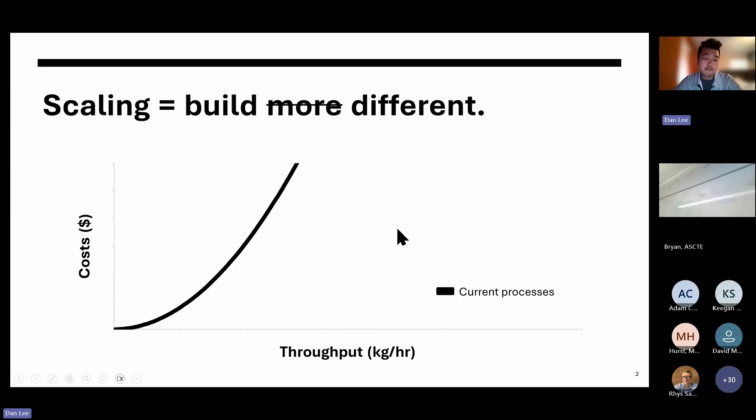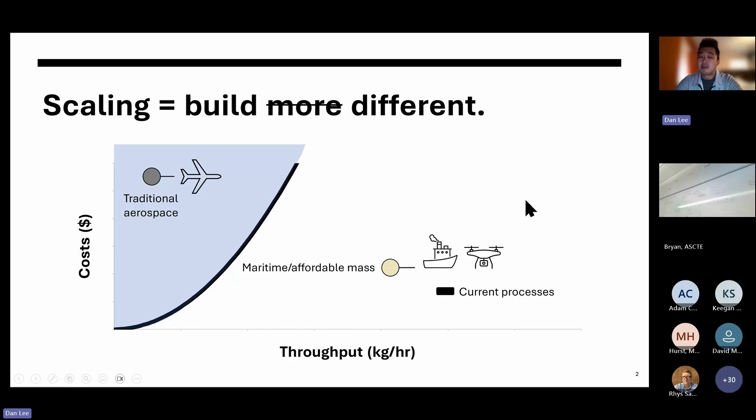So I'd say traditional aerospace is one of the very few that can afford it. But if we look at the new sectors emerging in maritime and affordable mass, they live on the opposite end of this curve, where you need the high throughputs and you also need them at low cost. So the challenge we set for ourselves is how do we achieve a cost curve where we can achieve high throughputs without exploding the cost with equipment.

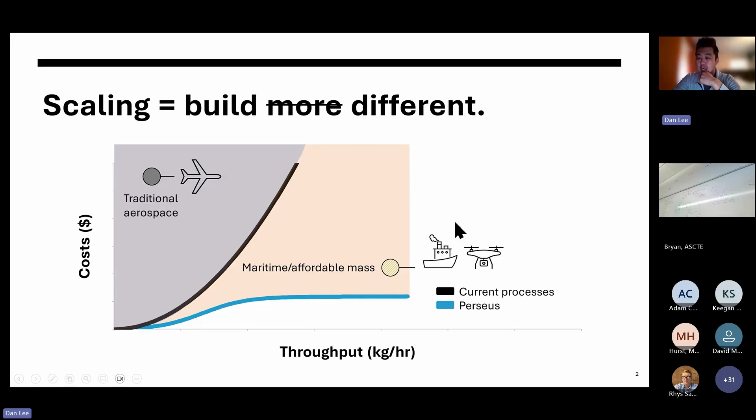We're a relatively small team, but we thought that what we needed to do was assemble a core set of expertise that allowed us to approach the problem very differently. So we're a team of 5 engineers, but I want to highlight some of the key perspectives we bring. I have a PhD in synthetic chemistry and experience in industrial and process control.

I worked in oil and gas for the early part of my career. And then Munir, our CTO, is a materials and process leader and expert in composite materials. He spent 20 years in aviation and brings that rigor and more conventional ways of thinking about composites and the manufacturing, both traditional and high throughput.

But what we've also done is surround ourselves with advisors in industries that we think bring very important constraints. So I'm going to highlight the middle two here, Ryan and Steve. These are industry giants from wind turbine blade manufacturing. To us, that is critical because I'm talking about blades that are 100 meters, 300 feet long.

The reason we think this is a very important industry to learn from is that wind energy is cost constrained. It has to compete for energy prices against solar and natural gas. So if we look at the total cost of a finished blade that's 300 feet long, it's on the order of $5 a pound, which is an order of magnitude lower than high-end aerospace composites. There's a lot that we think we can adapt from this industry into things like maritime and affordable mass.

So the insight that we bring on the technology side is that non-natural behavior resins are important to break that cost curve. So I want to break down a little bit more. If we look at a traditional composite today...

They can be made of multiple materials, but in general you have fibers and a binder or a resin. These fibers dominate the properties, and the resins dominate the processing. And in general, these are notorious to scale in speed or in automation, whatever it is.

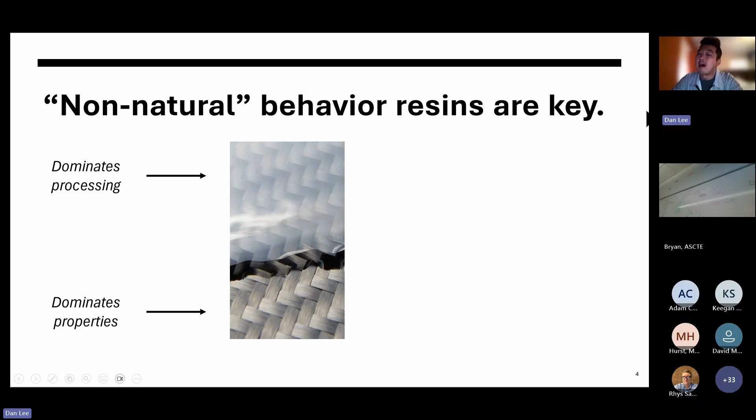When we started, I was an industry outsider, so to me it was very obvious that these were unscalable. If we look back to the first composites we've ever made as humans, let's say straw and mud, we kind of build them the same way. We've upgraded the straw to carbon fiber and the mud to an epoxy, but operationally they're nearly identical.

We mix the stuff together, we shape it, and then we have to wait. That is really defined by the kinetics and the behavior of that binder. So the way the epoxies cure, the mud dries, it enforces a lot of the very similar constraints.

So when we start to think about how do we make step changes in composite manufacturing, we wanted to attack the binder. And we wanted to go not just into how do we make faster curing resins or stronger resins - we wanted resins that behave on axes that don't even exist today.

So if you think about a traditional epoxy, let's say, or a snap cure epoxy, they are very different, and they do allow differences in manufacturing, but they exist on that same axis of how long does it take to cure - is it on the order of hours or is it seconds to minutes?

So to make entirely new processes that are very different and far more efficient, we needed resins that also behave on axes that we don't even think about today. So as a polymer chemist, we were digging into literature and doing a lot of research on these very odd behaviors. We landed on a phenomenon that today is known as frontal polymerization.

And that's been known since the 1970s. It's very difficult to induce for all sorts of technical reasons, but I want to show you what it looks like in general.

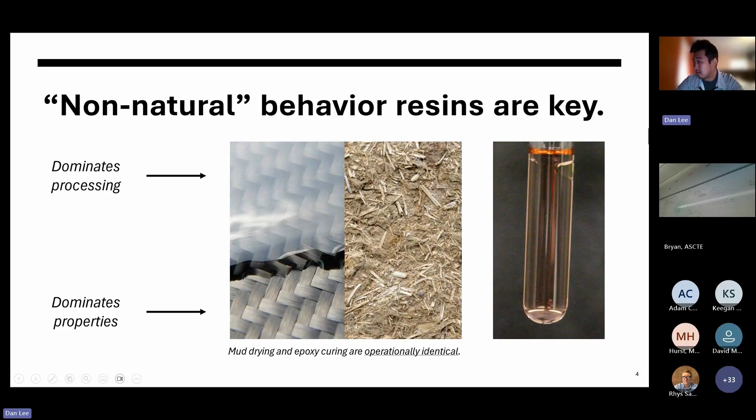So this is a vial of our resins that is sitting at maybe 20 Celsius, so ambient temperatures. What we do is we initiate a curing reaction, and then we can watch it happen in real time. So the top is a completely cured material, 100% cure, and the bottom remains 0% cure.

And it happens heterogeneously. So instead of, let's say in a traditional cure, where you have your whole volume of resin kind of going - if you measure the rate of cure at any point during a traditional cure, it's the same everywhere - in this case, you have a very fast cure in different regions and 0% rate of cure in different regions.

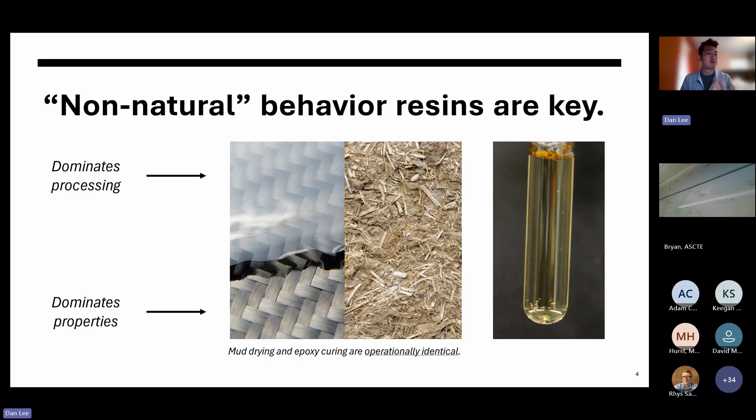And so this kind of opens up all sorts of new ways to think about how do we do continuous processing of batch-wise processes, and we can talk about all sorts of other things it enables. But what we then did was we took this base behavior that we thought would enable all sorts of different processes, and we built the first core manufacturing technology.

And this is the technology that launched Perseus in '22 and '23, funded by ARPA-E Innovation Crossroads, which is a kind of entrepreneurship program out of Oak Ridge National Laboratory, National Science Foundation. And conceptually, we also won the Startup Booster at JEC World, which is the largest composites trade show, and it was in Paris last year.

So a little bit more about how it works. Again, we're currently focusing on beams and panels, and we want to use them for things like spars, stringers, hulls, things like that. And I want to show you these a little bit more in detail.

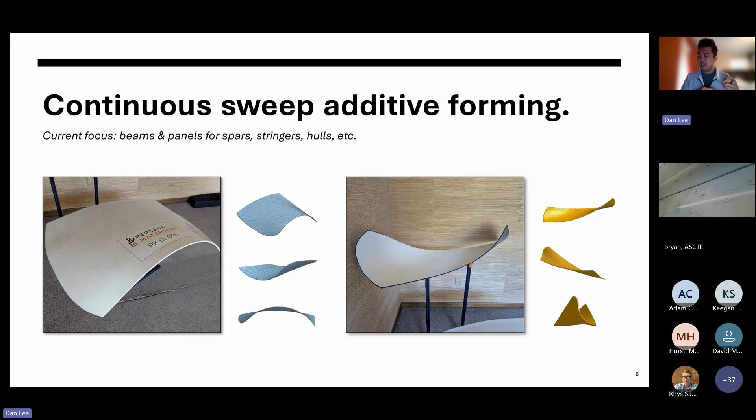It's like 3D printing in that we have a digital file that we convert and use to control the machine, but we also have a continuous forming process, and I'll show you a video about it. So the way that we think about how this process fits into the landscape of very advanced technology.

One of the ways that we can break this down is we have high rates and low rates in terms of kilograms per hour, and then static tooling on the left and adaptable tooling on the right. They all have their niches.

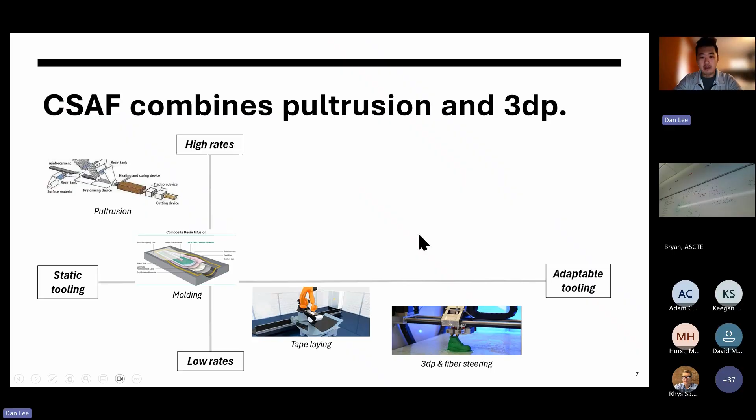I'm not saying it's better or worse, but what we're trying to do is combine a manufacturing process that allows us to achieve the adaptability and low lead times of 3D printing with the low cycle times of processes like pultrusion, and how we might do that.

So obviously the way we're doing that is we're limiting the kinds of geometries and topologies we're currently able to make, but this is the ultimate goal: a suite of manufacturing processes that can tackle both lead time and cycle times simultaneously.

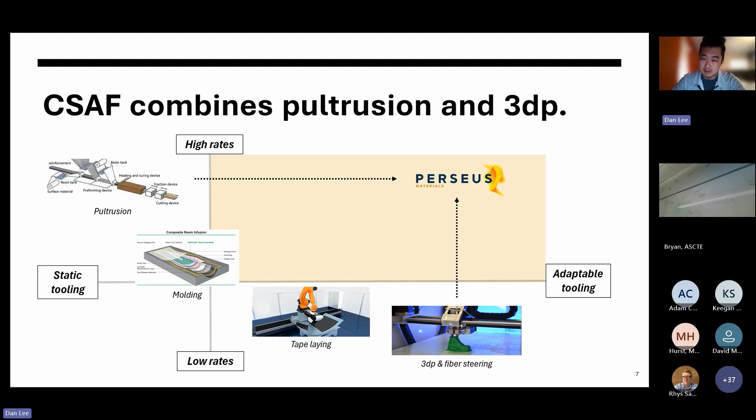On a very high schematic level, what we do is, in this one, the machine is reduced to, let's say, that frame. And in that frame there are these actuators with a white material, which we use as the kind of adaptable molding surface.

So we load our fibers, and like pultrusion, we use continuous fibers. We can pull them through a bath, and then load them into the machine. But like 3D printing, we also load a CAD file, and we have a way to communicate with this machine. As we continue to pull that part through, we can shape it and cure it simultaneously.

And if you think about where that frontal polymerization is, where that interface between liquid and solid is, we control that very precisely in that machine, and we do it in that plane of the die.

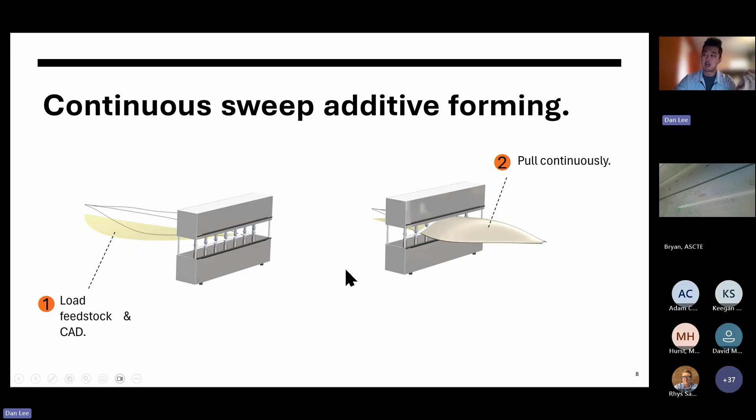So upstream of the die is completely liquid, uncured material, and then downstream of the die is solidified material without a post cure.

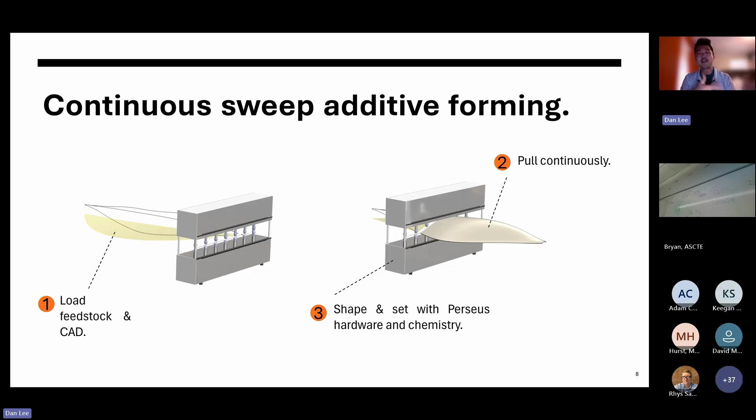And so, I wouldn't say it's easy. There are unique challenges with this type of process control, but it's been an interesting pursuit.

Here's a video of our very first, I would say, large-ish piece. It was about 4 feet by 6 feet, with a laminate thickness of about half an inch. This laminate started at half an inch thick, so here it's flat, and we use this to demonstrate.

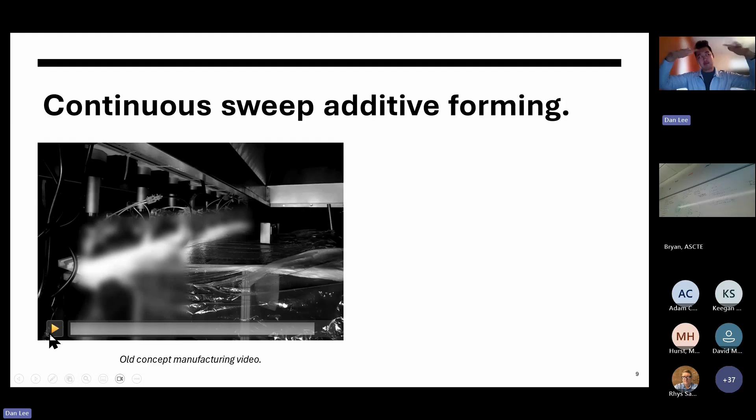As we're pulling, we're going to change it from a flat to an arc. Obviously this is already cured, so it stays flat on the right end, and then it's arced coming out of the machine. You can see it over here.

The reason I paused it here is on the left side you can see it's very loose fabric. We use 1200 GSM stitched, Saertex product, and we can use kind of any fiber freeform, but in this case we use stitched mats.

These are unidirectional fibers, and this had 13 layers of glass in it. But you can see over here it's loose.

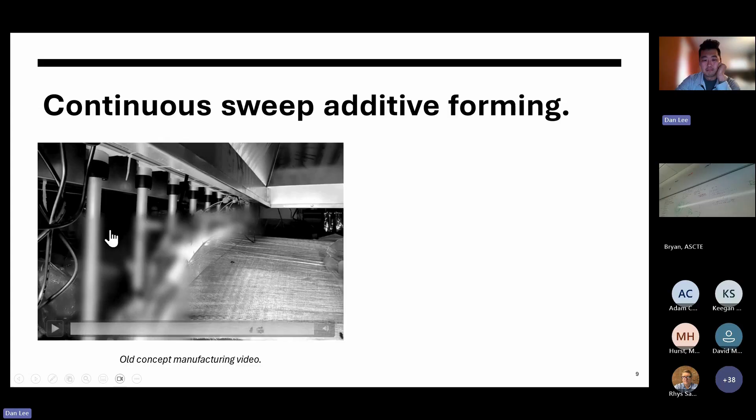But at this thickness, we can pull at about 12 inches a minute, and that puts us on the order of a production rate of 200 kilograms an hour.

And we're working on all sorts of different ways to improve this. I would say the tolerances are definitely the most interesting challenge. There are lots of trade-offs that we make in this machine.

For example, the harder we compress — since it's mechanically induced — we can push harder and harder to compress that composite more and more. This is one way that we try to think outside of autoclave processing.

We can achieve 90 psi, we can achieve 500 psi if we wanted to, because it's mechanically induced. But there are other trade-offs that we make in the form tolerances. For example, as we squish more and more, the actuators bend out of plane. So there are some compromises that we have to make in the current iteration of the machine.

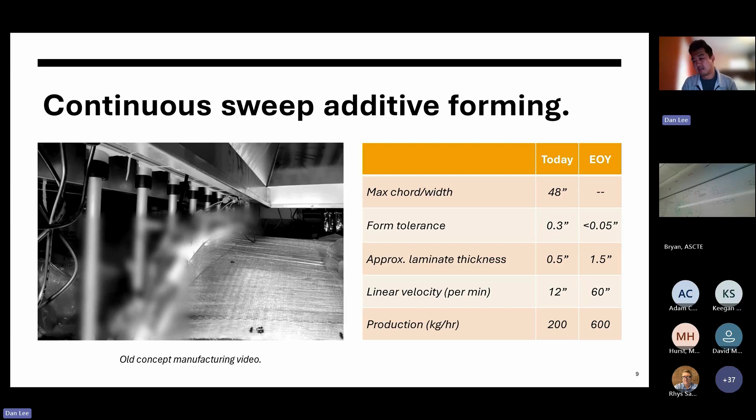I assume that these will be where most of the questions are, and we can talk about that.

Our timeline so far: in late 2022 was when the company was founded, and in 2023 was when the grants were awarded for that preliminary CSAF R&D process from the government agencies. In late 2024, which is where that video I showed you, is where we validated that concept.

For us, we've really focused on how do we get the throughputs and the sizes before the properties. Not that we're not focused on properties - it's very important, but there are 1.5 million ways to get high quality composites. What we thought really was missing was the ability to make these large components.

So far we focused on the lengths - we can go infinite lengths. The widths, currently we're 4 feet, but it's very easy to just build. It's an 80-20 frame, aluminum extrusion frame, and it's very easy for us to continue to widen out.

If you think about some of the targets that we're looking at, it's wind turbine blades, and they can be like 12 feet in chord length and 6 inches of laminate - these are just enormous structures. We're developing a lot of these, and hoping to adapt some of those same learnings and process technologies towards things that look very similar to a wind blade.

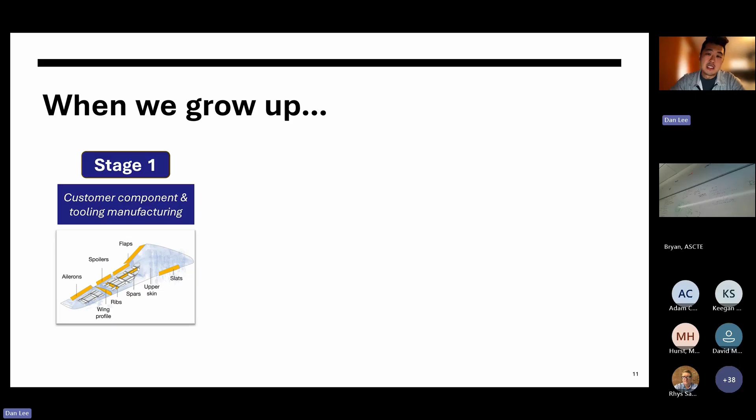So yeah, we're quite young, and we will be a custom component and tooling manufacturer for the next 3 years at the very least. But we're also trying to understand how this enables different ways to assemble assemblies. So if a customer can order a large custom structural component, let's say a spar that runs the whole length of a wing, or the shells of that wing, how does that change the way we design and assemble this thing for more efficiency?

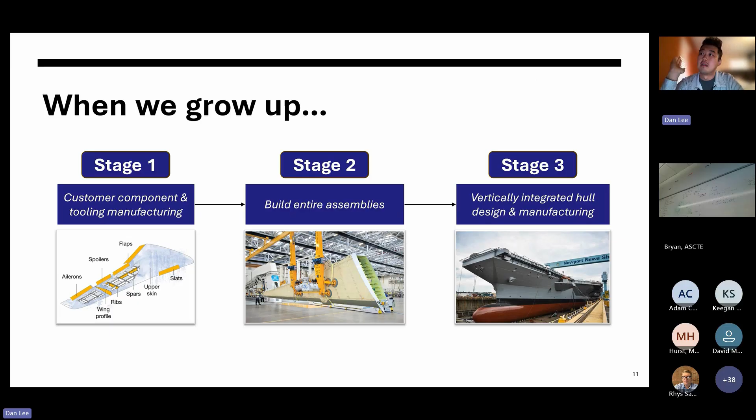And one of the things we're also evaluating, again many years out, is if we really believe we can make assemblies a lot cheaper, then we can explore vertically integrating completely into things like shipbuilding, hull design, and manufacturing. These are things we muse about, but obviously we're thinking about how do we demonstrate value, how do we demonstrate reliability and quality in the factory environment, and then for customers to integrate that into things they're using today.